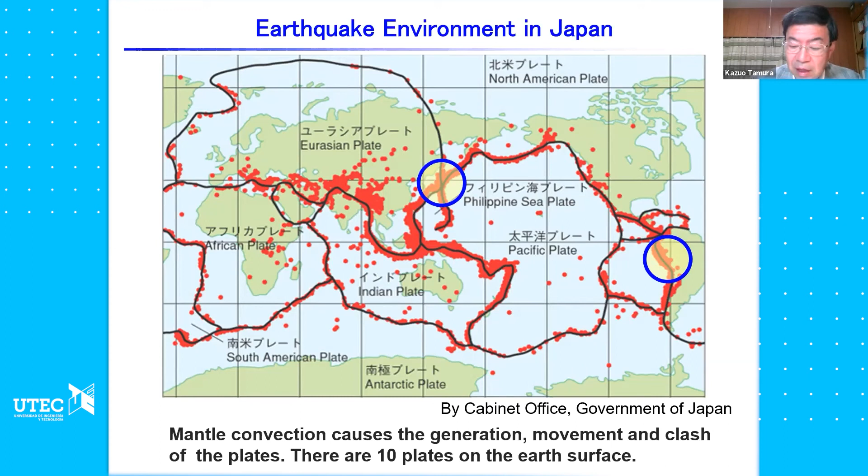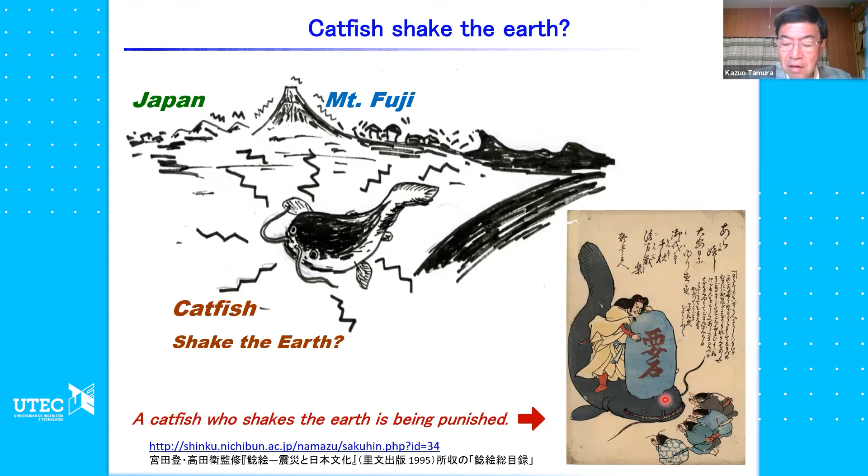In Japan, modern structural technologies have been applied, developed, and progressed since the late 1800s. However, these structures were often damaged by large earthquakes. The structural systems and seismic design methods have progressed through the experience of these earthquake disasters. But now, a vast majority of building structures in Japan are designed by the earthquake-proof design method. At the same time, the idea of isolating the structure from earthquake ground motion had been a people's dream. From now, I will talk about ideas and development of seismic isolation.

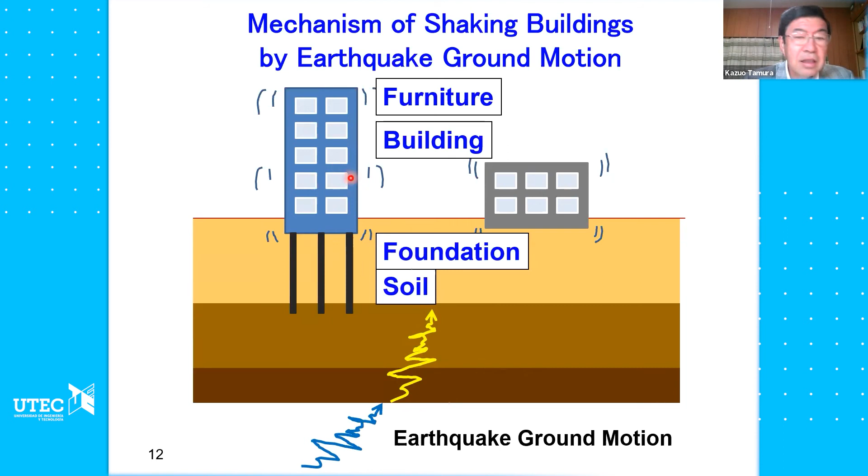Buildings are shaken by the earthquake ground motion, like this figure. The soil under the foundation shakes the buildings, and the building shakes the furniture in the building. By inserting an isolation layer at the bottom of the building, the shaking amplitude of the building and the furniture will be reduced. This is seismic isolation.

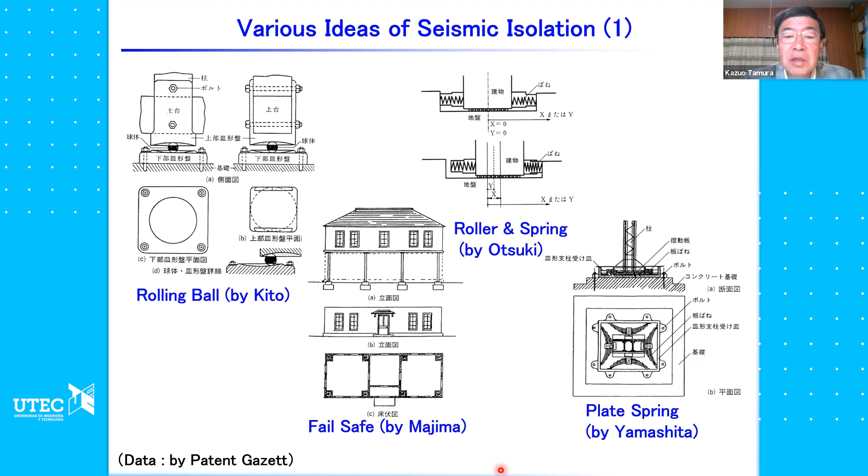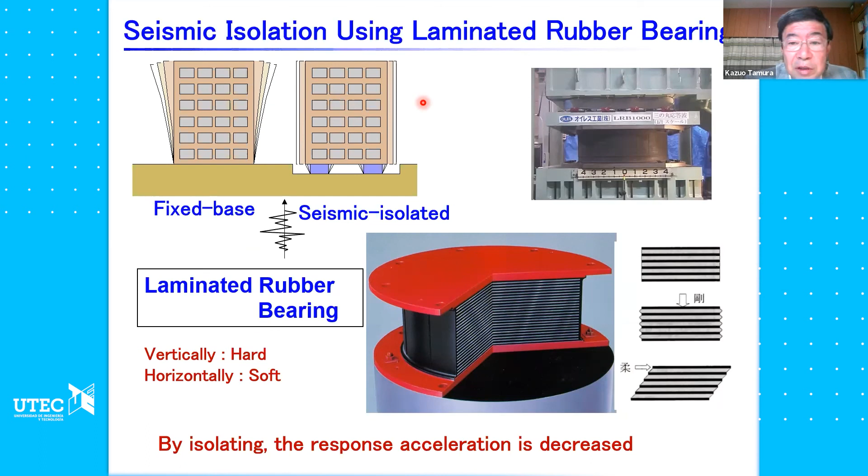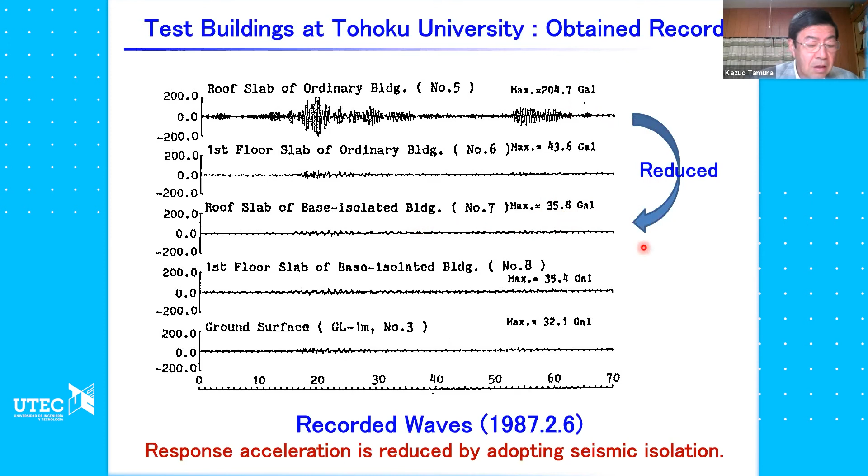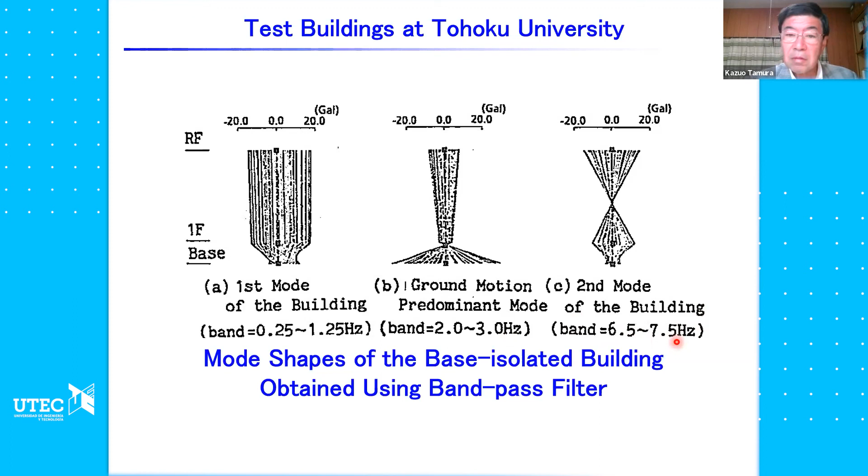In the simulator tests, the level of earthquake input motion included the design level and also the ultimate level. Ultimate level means a very large amplitude level, since we wanted to know the ultimate response properties. The applied maximum shaking level was 60 to 70 centimeters per second in this case.

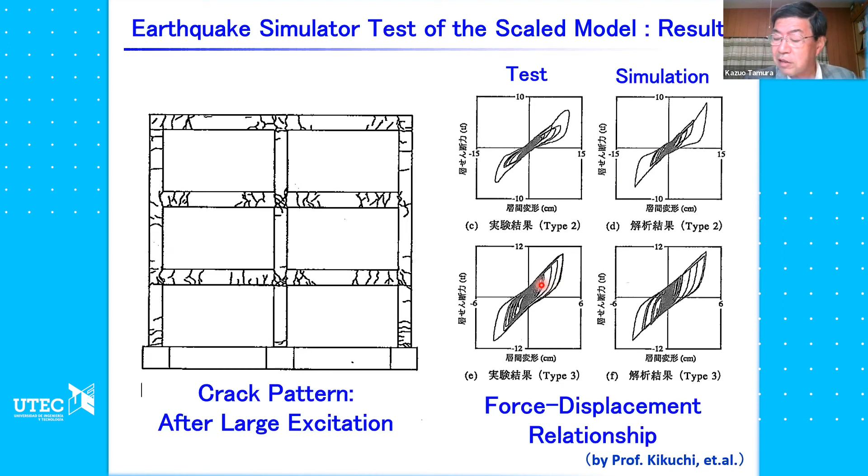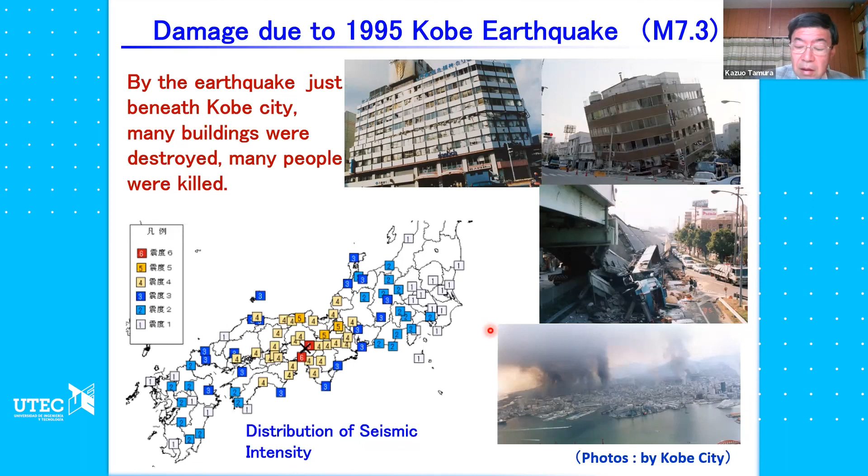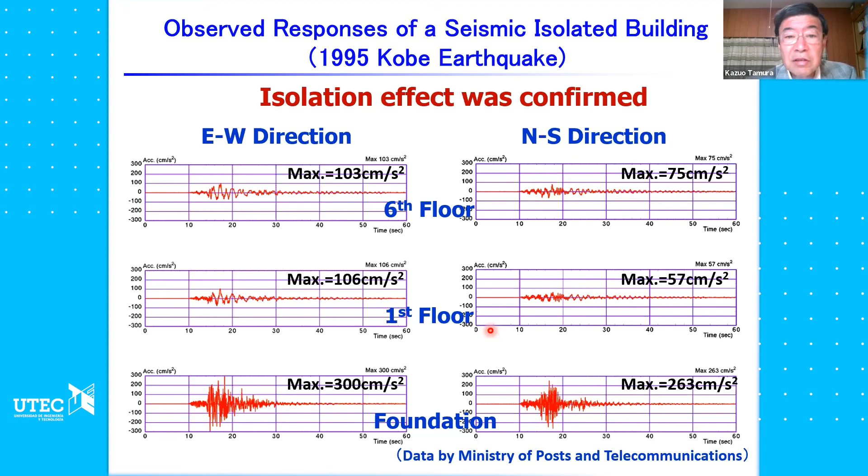Because the effectiveness of the seismic isolation method was demonstrated successfully by this building, seismic isolated buildings have increased drastically after the Kobe earthquake.

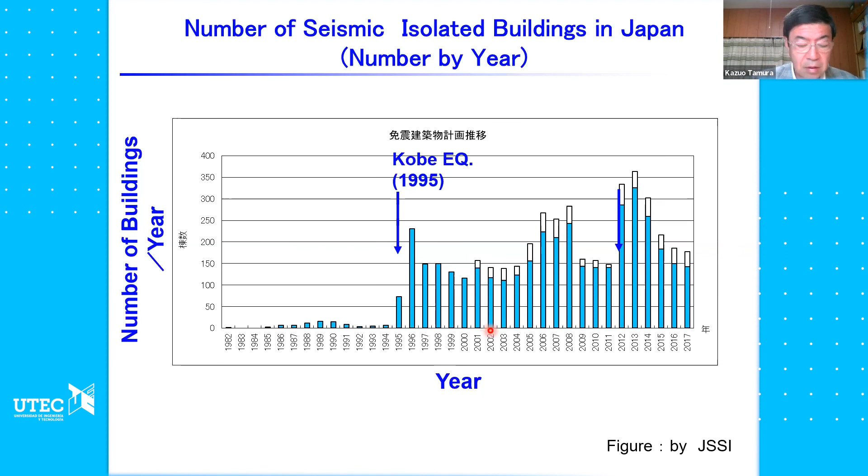The seismic isolation method has also been applied to existing old and historical buildings as a way of seismic retrofitting or strengthening.

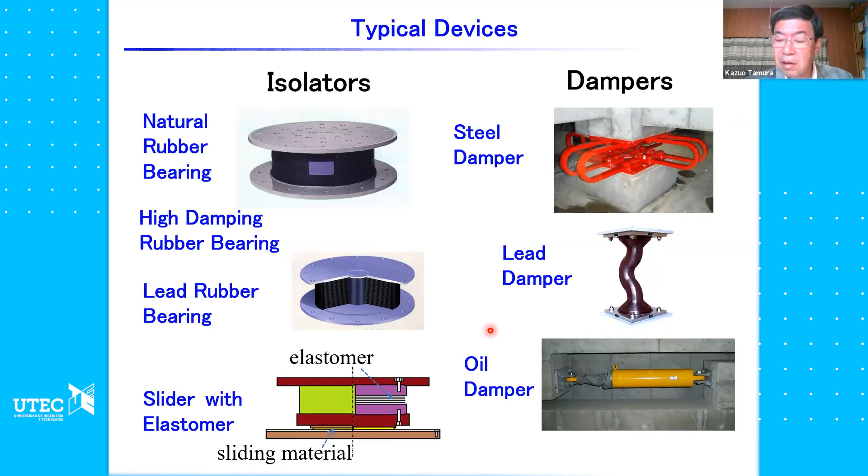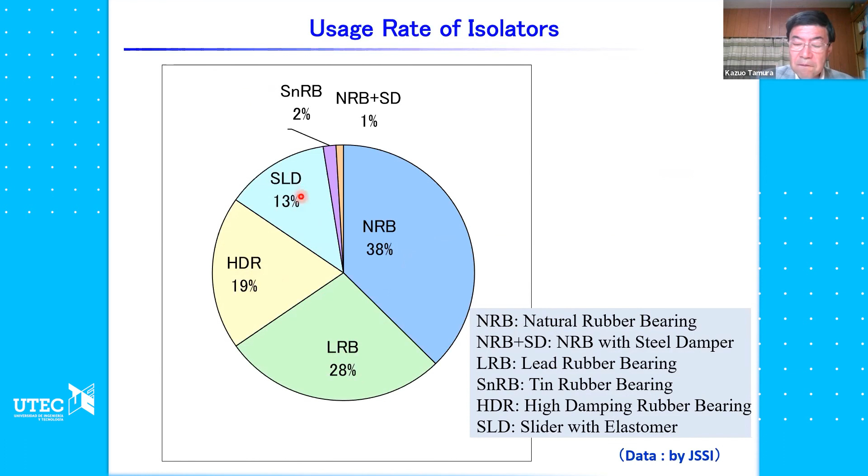As I have already mentioned, there are now around 5,000 seismic isolated buildings in Japan, and until now, all the isolated buildings which suffered large earthquake ground motion have demonstrated the effectiveness of the seismic isolation in real actual earthquakes.

Recently, seismic isolated buildings whose isolation layer is at the mid-story have become popular. In the case that the use of building differs at the upper and lower floors, this type of mid-story isolated structure can be effectively designed. But the balance among the mass, stiffness, and strength of the upper structure, lower structure, and isolation layer is very important, so the response properties of mid-story isolated buildings are carefully evaluated in each case.

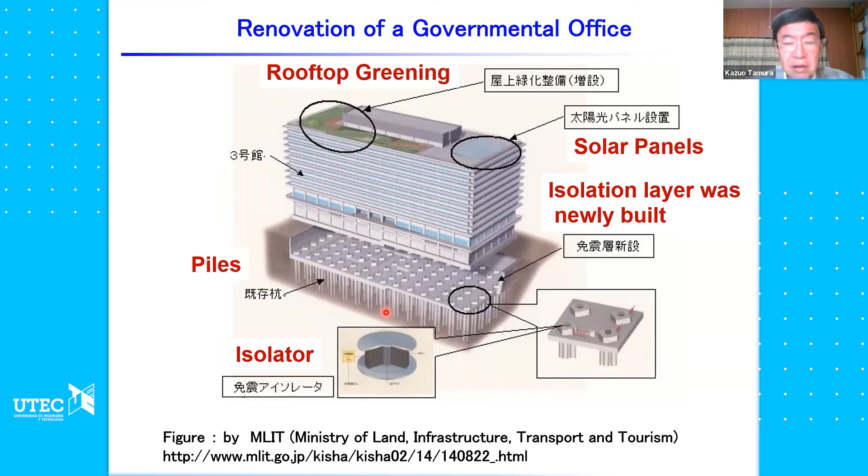This is an example where a governmental office was renovated using seismic isolation retrofitting. The isolation layer was newly built, and many isolators were installed under the building, along with the existing piles. By using this method, the building was seismically reinforced while still in use.

Next, I am going to introduce the performance of seismic isolated structures in recent large earthquakes by showing examples, starting with the 2011 Tohoku earthquake, a very big earthquake. The magnitude was 9.0, the fourth largest earthquake in the world. The size of the fault is about 500 kilometers by 200 kilometers. Almost all of Japan was shaken by the earthquake, and a great many lives were lost due to the huge tsunami.

This earthquake caused various kinds of serious damage. The strongly shaken area was so broad that a great many structures were affected and received various types of damage. In this earthquake, many records of ground motions and responses of structures were obtained. We now have a large number of seismic isolated buildings in Japan, many equipped with seismographs.

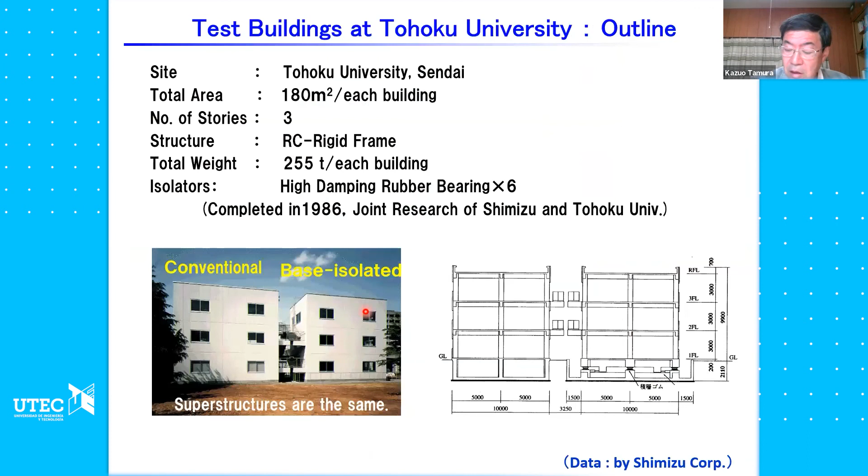Next is the seismic isolated Ishinomaki Red Cross Hospital building. This building is located in Ishinomaki City, which was struck by a huge tsunami and earthquake, and the shaking amplitude was very large because the distance from the earthquake source was very short. This building played an important role just after the earthquake. Even though the ground shaking was very severe, this seismic isolated building maintained its function as a hospital, and a great many injured people received medical treatment there after the earthquake.

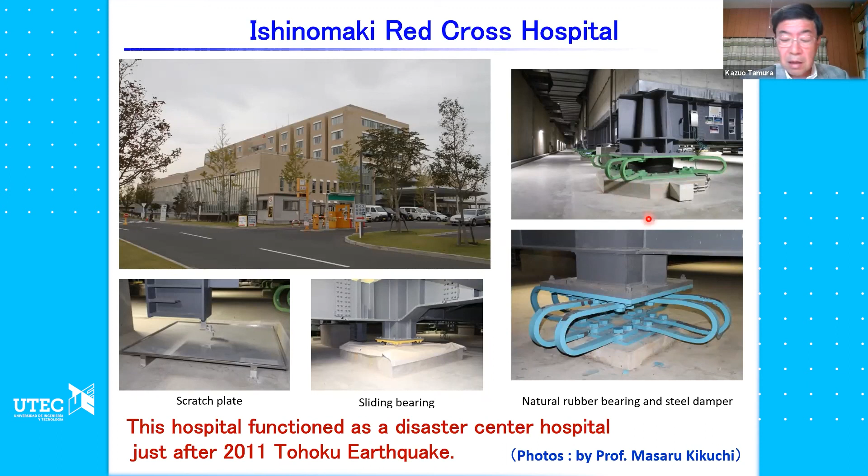This movie... it doesn't work, that's no good. A very exciting video that cannot work.

Professor Tamura, please press escape and then you will have your mouse back. Escape, yes, press escape once, just press it on your keyboard, the top left key. Okay, now you can click on your video. You have your mouse back. Thank you.

This movie shows the state of the hospital when the earthquake occurred. This is an isolated building, but if this building was not isolated, a more severe condition would have been observed.

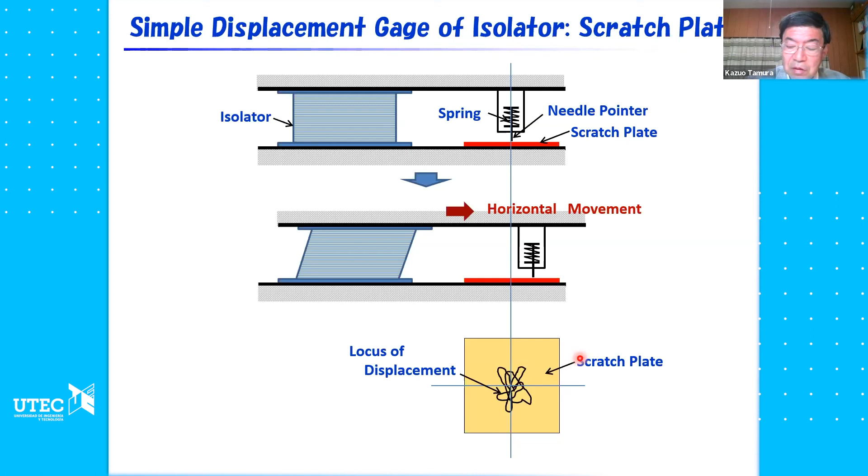Next, I am going to talk about seismic isolated buildings located in Tokyo, which was about 300 kilometers apart from the epicenter of the earthquake.

However, the ground shaking was very strong. The observed acceleration was about 150 to 200 Gal.

This figure roughly shows the response level of buildings in Tokyo. This right graph shows roughly the earthquake shaking levels. The response level of ordinary buildings was about 250 to 300 Gal.

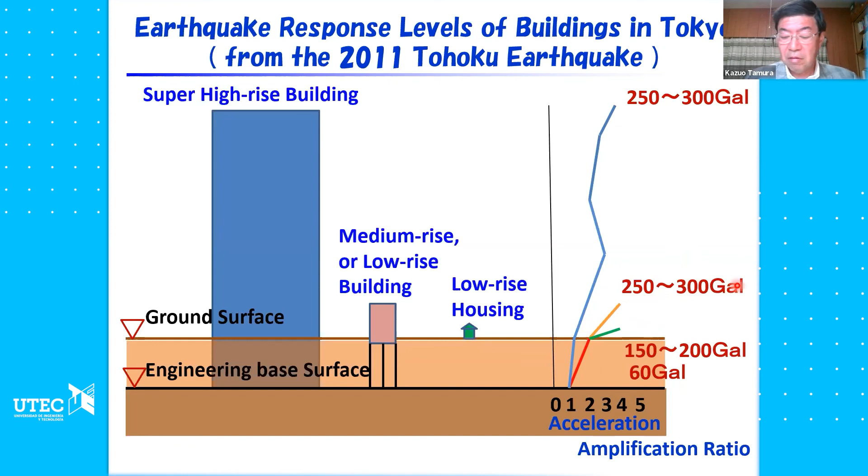Here I'm going to introduce the responses of seismic isolated buildings in Tokyo. There are many seismic isolated buildings in Tokyo. As an example, I will show you this building. I had worked for Shimizu Corporation and worked in this building. This building is the main building of Shimizu Institute of Technology. The building is supported by 6 lead rubber bearings installed on top of RC columns in the ground floor.

A video camera is set up beside one isolator and successfully recorded the real movement of the isolator. The maximum displacement of the rubber bearing was about 8 centimeters in this building.

This is a recorded motion video. Once again, the actual movement, very small movement, but like this. Actually, the upper building was moving.

Okay, thank you. Maybe time is past.

As the last example of seismic isolation, I'm going to introduce a seismic retrofit. The National Museum of Western Art was designed by a famous artist, Le Corbusier. The museum was registered as one of the UNESCO World Heritage sites in 2016.

This museum was constructed originally in 1959 based on the conventional earthquake-proof design code at that time. It was seismically upgraded in 1998 by applying the seismic isolation system. A new isolation layer was built under the original foundation, and 49 high damping rubber bearings were installed under the superstructure. This is Japan's first seismic isolation retrofit project.

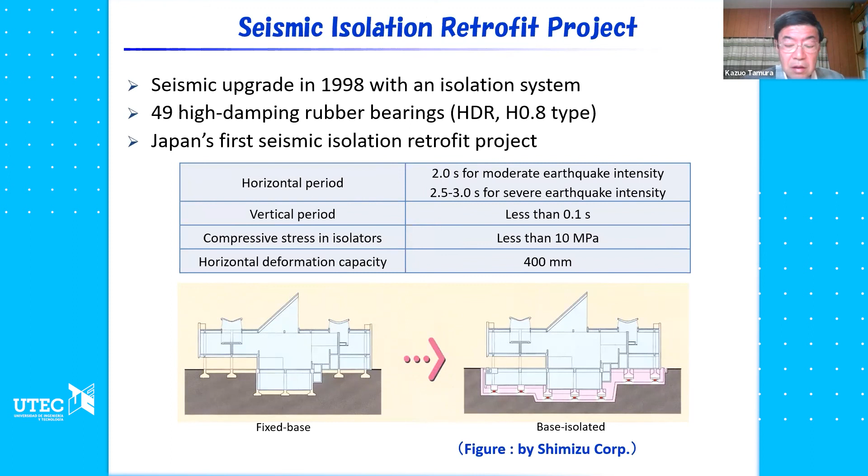This is the simulation result by Prof. Kikuchi of Hokkaido University. It's very good simulation - the simulated motion and observed motion are almost the same.

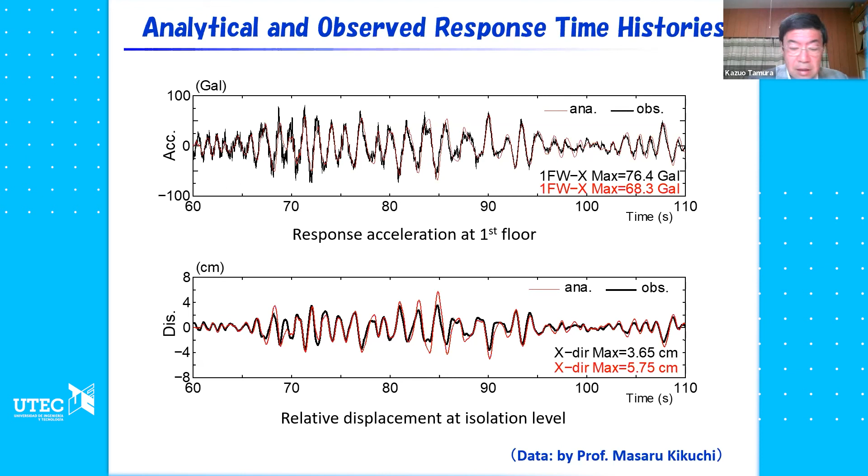One more, maybe two more slides. In 2016, large earthquake waves attacked Kumamoto prefecture, located on Kyushu island far west of Tokyo. Now I'm going to introduce the seismic isolated hospital located in this area.

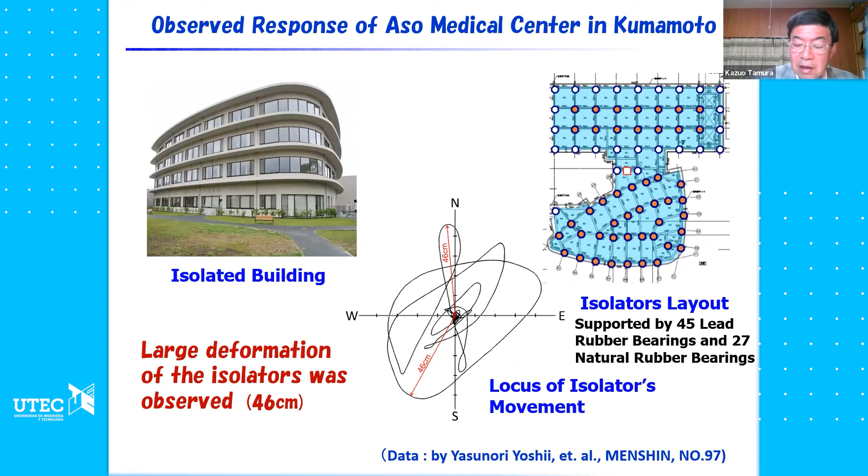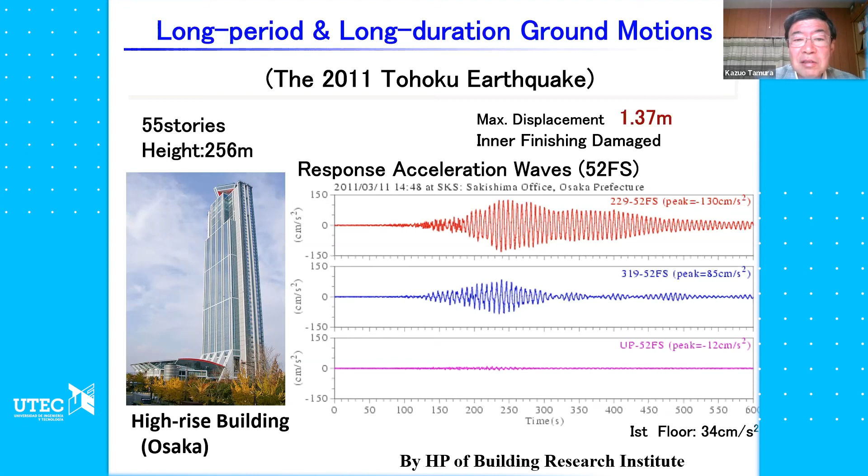Because time has come, I will skip this one. In Japan, long period, long duration earthquake motion was a topic for the design of isolated buildings. We are now focusing on this long period, long duration earthquake motion. So ultimate behavior of seismic isolated buildings is one of the main topics in seismic isolated building design.

This is where I will stop my presentation. Thank you very much. This is the end.

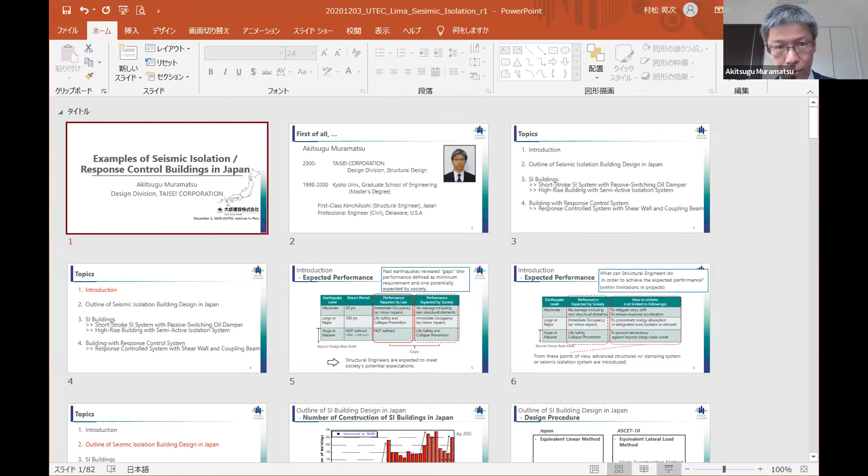This is my presentation title: Examples of Seismic Isolation Response Control Buildings in Japan. My name is Akitsugu Muramatsu. I'm a structural engineer from Taisei Corporation, a construction company based in Japan. I started my career as a structural engineer in 2000.

These are today's topics. First is introduction, second is outline of seismic isolation building design in Japan. Then I'd like to introduce two SI buildings—in my presentation, SI means seismic isolation—and one building with a response control system.

This is the first topic: the background of my presentation. Past earthquakes revealed gaps between the performance defined as minimum requirement by law and the performance potentially expected by society. This table shows the minimum required performance and the expected performance according to each earthquake level. There are gaps between the two, and usually expected performance is higher than minimum requirement.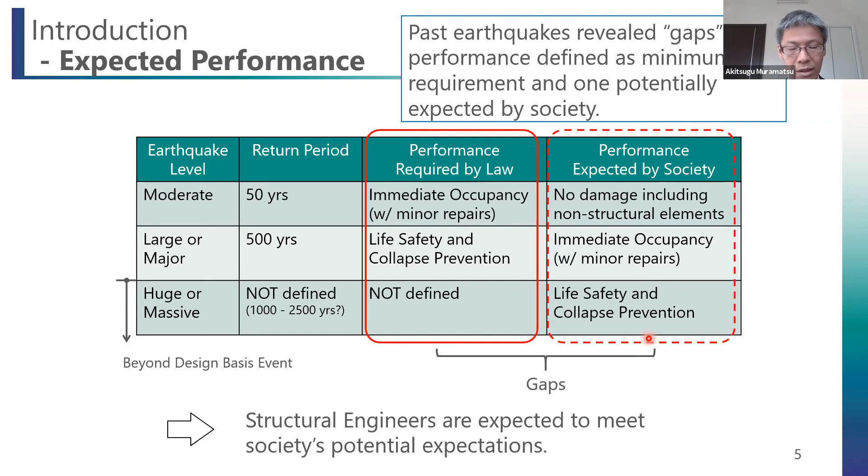This is the second topic: outline of seismic isolation building design in Japan. This figure shows the number of SI buildings constructed in Japan. The vertical axis shows the number of SI buildings, and the horizontal axis shows year. Until 1995, the number of SI buildings was not so high.

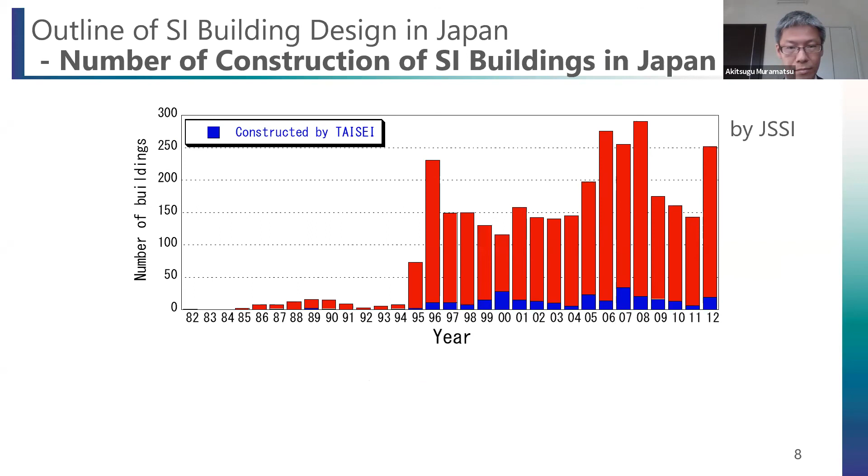In 1995, a large earthquake occurred, the Kobe earthquake. After that, many people learned that the performance of SI buildings in protecting lives and properties was impressive. The number of SI buildings rapidly increased after the earthquake, here and here. Although there are a few sharp increases right after major earthquakes, the average number of construction of SI buildings was about 150 per year in the last two decades.

As of 2017, the total number is over 4,500, and our company has constructed about 10% of SI buildings in Japan. So I'd like to show some features of SI building design in Japan.

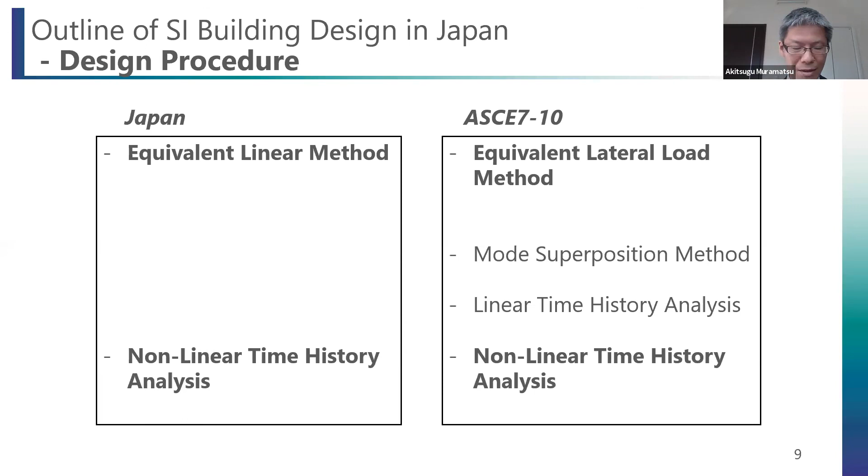I learned some materials about your country's seismic codes, which seemed similar to the United States design code. So I'll introduce some points comparing with the US seismic design code, ASCE 7-10. I also learned that your SI design code has already complied with ASCE 7-16, so this comparison with 7-10 may be a little different from your current code.

As for design procedure, two procedures are allowed to design SI buildings in Japan: static and dynamic procedures. The Japanese static procedure, the equivalent linear method, is similar to the US static procedure, the equivalent lateral load method. Nonlinear time history analysis is allowed as the dynamic procedure. Static procedure is simple and useful, but there are several restrictions on its application, so nonlinear time history analysis is widely used for design of many SI buildings in Japan.

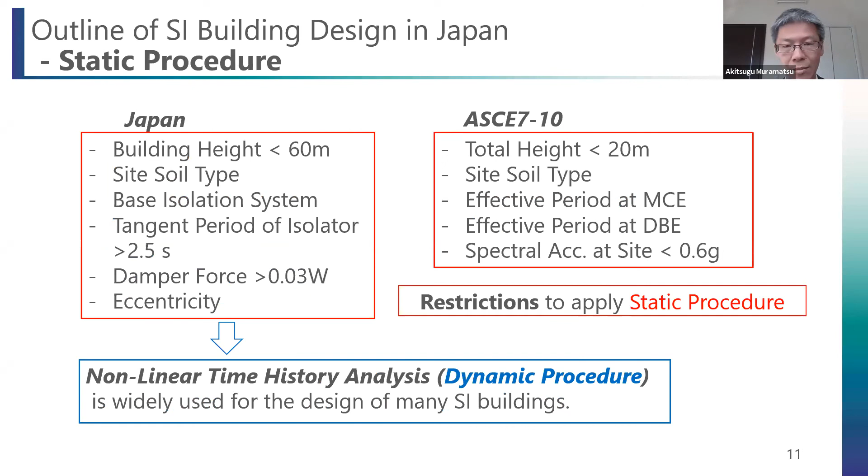As for typical types of SI systems, they usually consist of isolators and dampers. There are various devices to choose from, such as rubber bearings and sliding bearings for isolators, and oil dampers, steel dampers, lead dampers, and so on for dampers. Adequate devices should be selected to mitigate seismic response efficiently according to each building's type, use, and required performance.

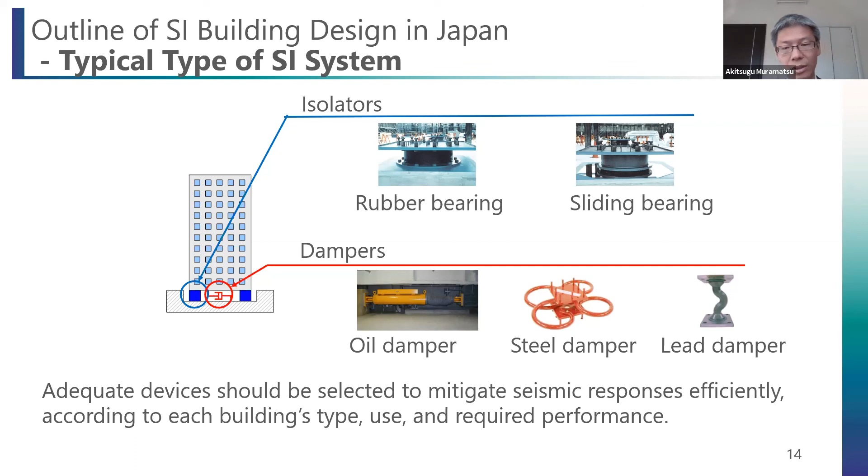This video shows dynamic tests of natural rubber bearing. Isolators can smoothly deform in horizontal directions and can support vertical load under large horizontal deformation. This is another video about sliding bearing.

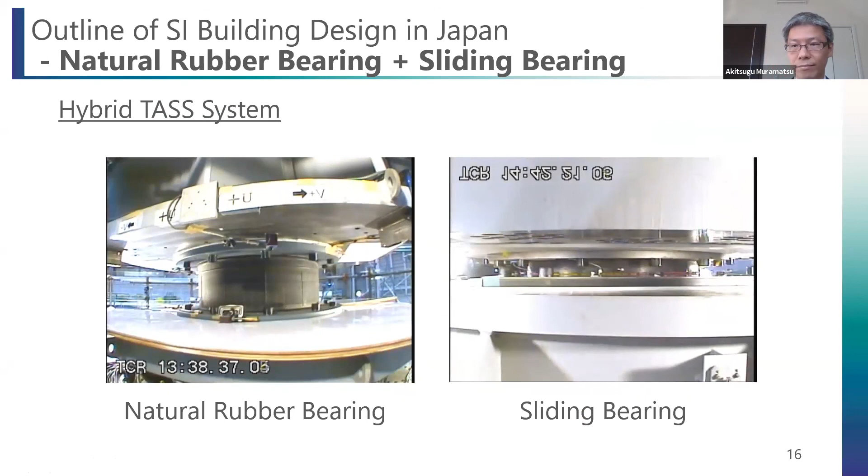The good performance of the hybrid SI system has been proved by past large earthquakes. These photos were taken in two hospital buildings, which were next to each other. The left one is inside a non-isolated building, and the right one is inside an isolated building. You can see the big difference between the two photos.

If you were a doctor, how would you work under the left photo's condition after an earthquake? The isolated building kept operational right after the earthquake. Keeping operational right after an earthquake is one of the great benefits of SI structures.

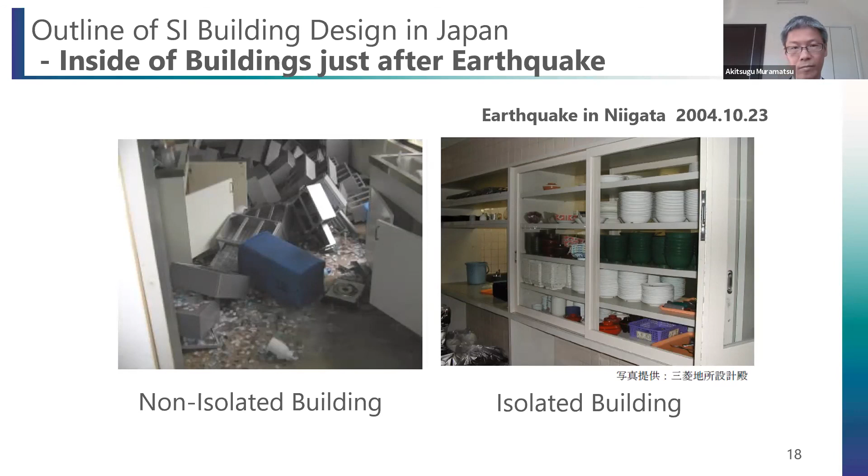So this is the next topic. I'd like to show one example of a short stroke SI system with a passive switching oil damper. This is the background of why we have developed this short stroke SI system.

After several major earthquakes in Japan, demands for SI systems are continuously growing, as I mentioned in the figure in the previous slide. Even for buildings of relatively small size, often located in densely urban areas like Tokyo or Lima, SI systems are highly required to protect property and operational function, and to achieve companies' business continuity plans, or BCP.

In order to implement an SI system in a small site, the response displacement of the isolation layer due to major earthquakes needs to be mitigated to keep the building area as large as possible. In conventional SI buildings, the design clearance between the building and the moat wall is usually 60 centimeters or so. In a relatively small site, if we wanted to keep the same clearance of 60 centimeters, the possible building area would be reduced. By mitigating the response displacement of the isolation layer, we can keep the building area as large as possible.

So large damping is necessary to mitigate the response displacement. For building response due to major earthquakes, if we install large damping into the isolation layer, we can prevent collision. But for frequent minor or moderate earthquakes, large damping will result in large response acceleration. This may not be good isolation performance.

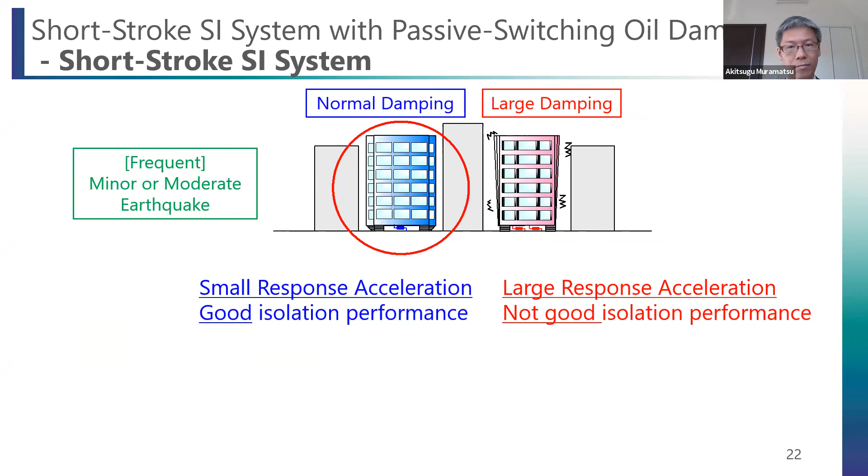So normal damping may be good in order to mitigate response acceleration due to minor or moderate earthquakes. Normal damping is preferable to large damping for minor or moderate earthquakes, but large damping is necessary to prevent collision during major earthquakes.

So this is the issue to be solved. In the case that the site is not spacious, mitigating response displacement during a major earthquake by large damping is necessary. But reducing response acceleration during a moderate earthquake is also required, and this is a contradiction.

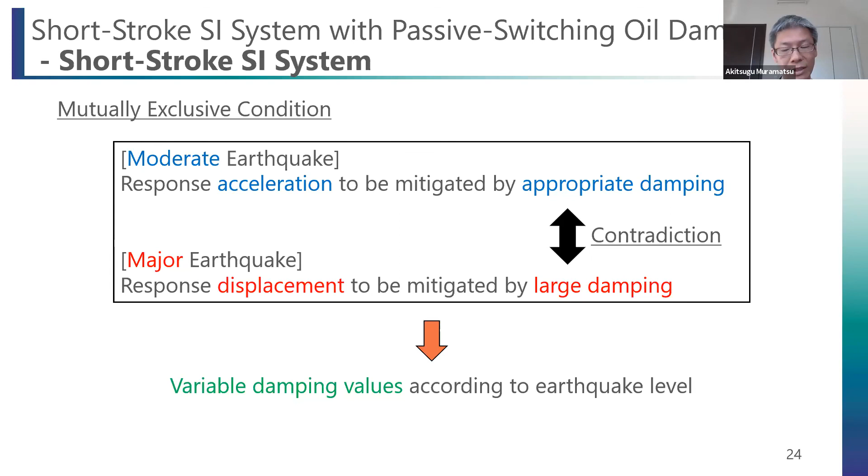So we employed a viscous damper whose properties can change. This variable damping means a lower damping coefficient for moderate earthquakes and a higher damping coefficient for major earthquakes. So we developed a passive switching oil damper. This is a kind of variable viscous damper.

This figure shows the damping properties of the passive switching oil damper. The vertical axis shows damping force, and the horizontal axis shows velocity. This damper has two modes. One is a lower damping mode, which is assigned to the initial condition.

The other one is a higher damping mode. The damping coefficient is switched from the lower one to the higher one after exceeding a designated displacement. In this project, we set 10 centimeters as the designated displacement. This displacement can be changed according to each project.

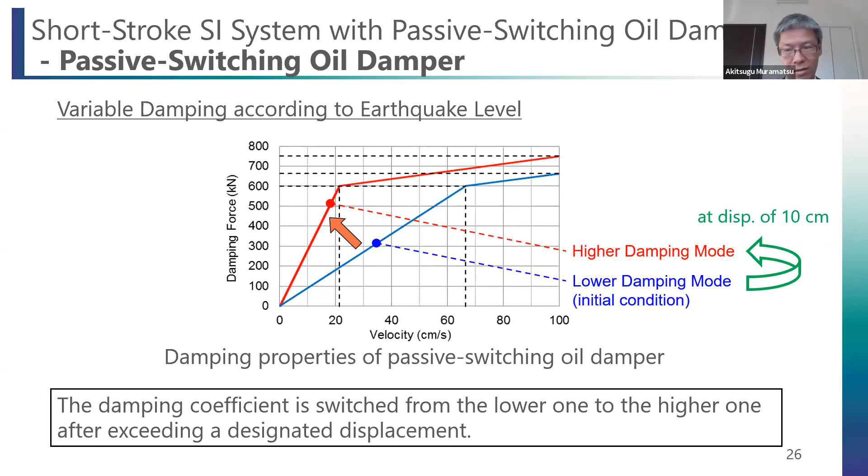This passive switching oil damper has high reliability. The damping coefficient is mechanically switched from lower to higher without electrical power, which leads to high reliability and easy maintenance. The shut-off valve stays closed once switched, so after the earthquake, the initial low damping mode is recovered by using a manually operated lever.

So this is a summary of merits of passive switching oil damper. The first one is low damping coefficient resulting in full demonstration of isolation performance during moderate earthquake. And high damping coefficient results in mitigation of response displacement during major earthquake, including beyond design basis event. So safety is ensured during major earthquake without compromising the sense of security during moderate one.

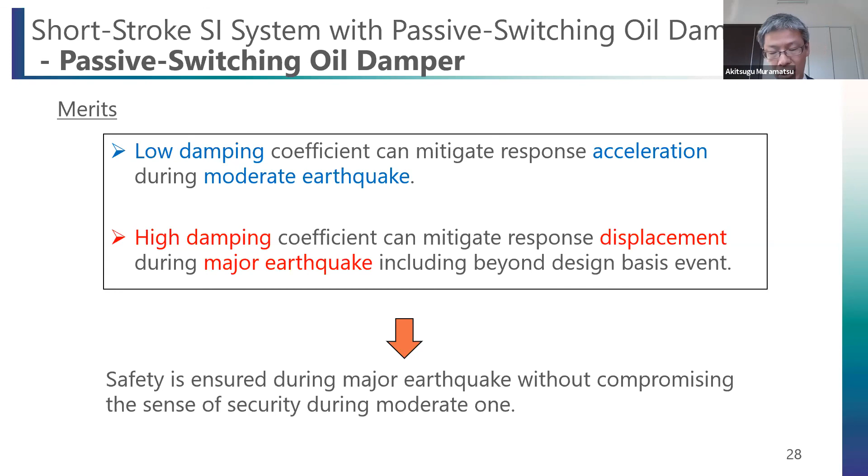We applied this system to a few buildings. I'd like to introduce one example, which is called ZEB demonstration building. This is a seismic isolation building with the passive switching oil damper, newly constructed in our technology center. This slide shows the structural systems. This is a 3-story building. Isolation layer is here.

And the lateral force resisting system of superstructure is moment resisting concrete frame with concrete shear wall and very slender column with high strength concrete of 300 megapascal as gravity element.

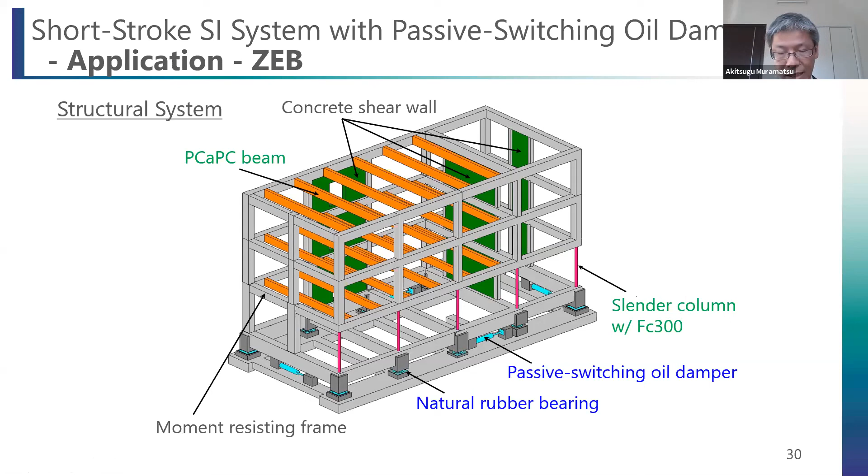And this slide shows the plan of isolation layer. The isolation system is composed of natural rubber bearing, the red one, and the flat sliding bearing, the blue one, and the passive switching oil damper, the green one. The design clearance between the building and the moat wall is 300 millimeters, which is almost half of the typical clearance of conventional seismic isolation structures.

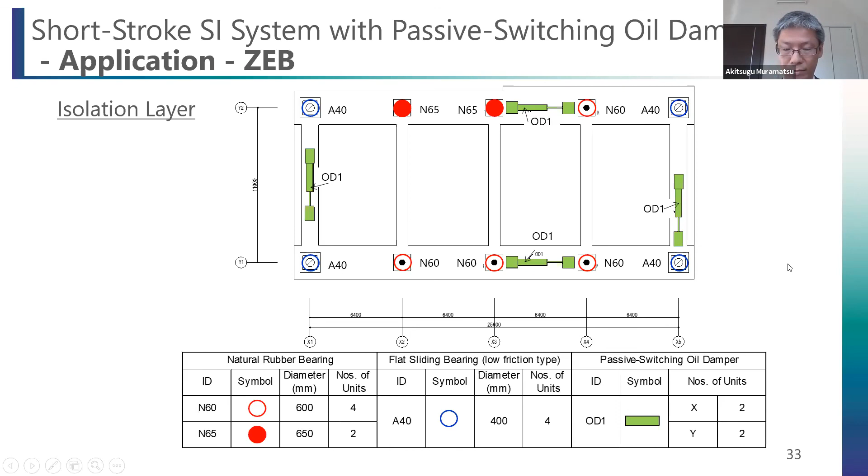And this is a comparison between passive switching oil damper and conventional oil damper. So the right figure shows the damping properties of oil dampers. Black line shows the property of conventional damper, and the red line shows the property of the higher damping mode of passive switching oil damper. The left figure shows the result of nonlinear time history analysis with stick model and major earthquake.

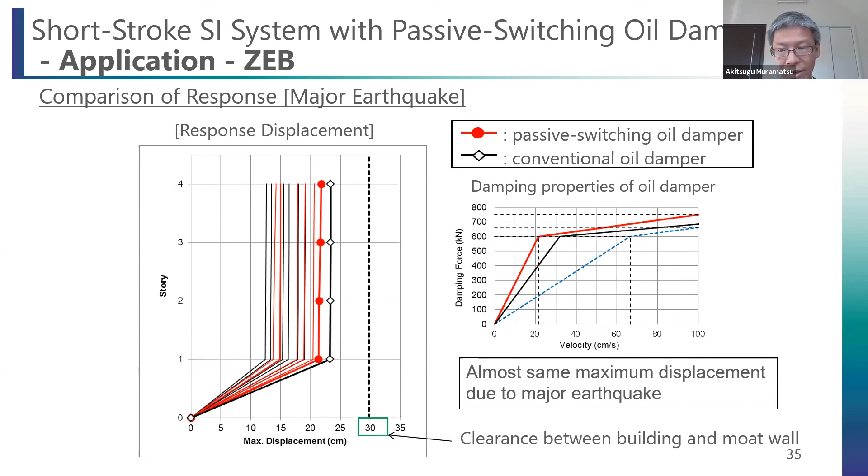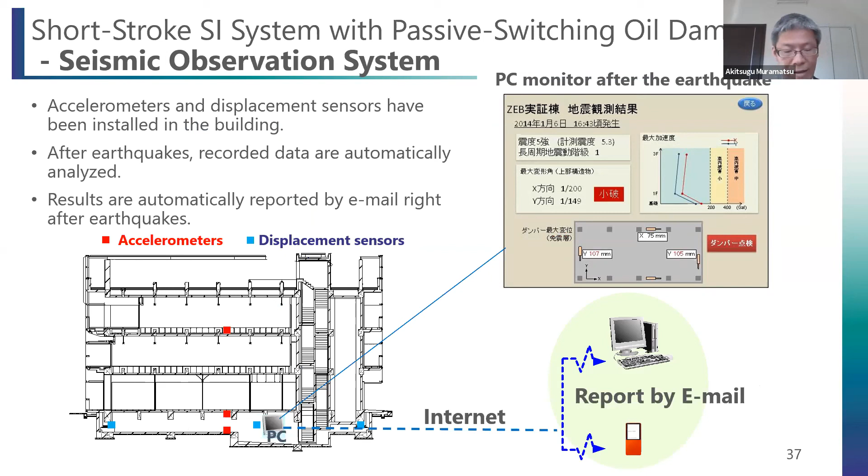And this slide shows an example of the automatic report. The red line shows the recorded acceleration in the main buildings, which is not a seismic isolation building. And the blue line shows the records in ZEB, which is next to the main building. So you can see the effect of seismic isolation is fully demonstrated.

And the short stroke seismic isolation system with passive switching of the damper has been applied to some buildings in Tokyo. The center one is an application to a high-rise building. And the right one is an application to an existing building of a local government.

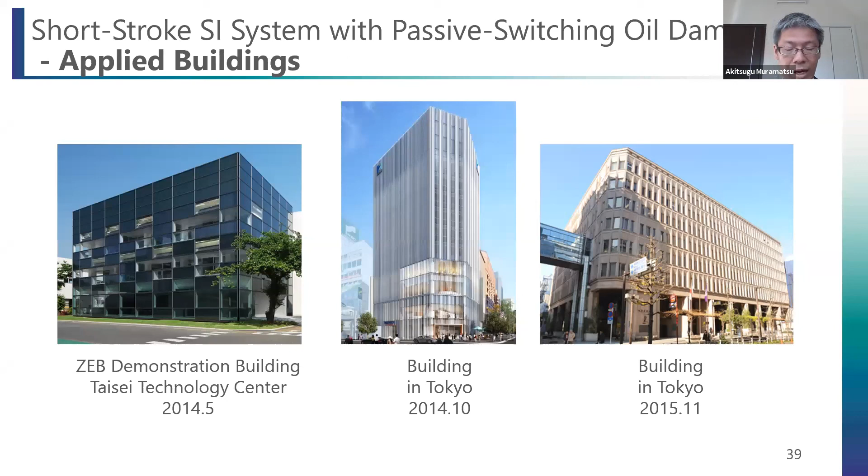And here, this is the next example. Another example is high-rise building with semi-active isolation system. This slide shows outline of semi-active isolation in chronological order.

When an earthquake occurs, sensors inside and outside the building catch the vibration. Then a computer starts calculation to get an optimal damping force according to the information from sensors. Computer controls damping force of oil dampers to mitigate shaking of buildings.

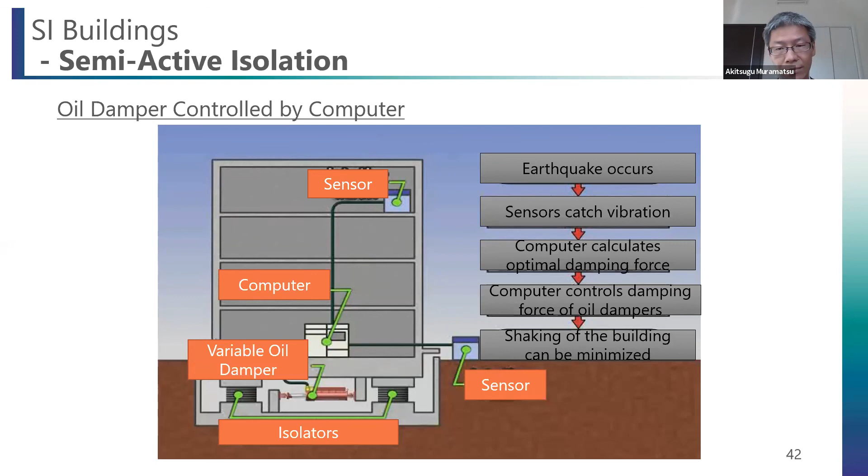And the semi-active isolation system has been adapted to this high-rise building. The height of the building is 130 meters. This building was constructed before the Tohoku earthquake in 2011, so we got some observed records.

These red square marks are recorded maximum acceleration, and the white squares with red line are the result of simulation. On the other hand, the blue line is the result of simulation if this building was not a SI building. So the semi-active isolation system can significantly reduce the maximum response acceleration.

The acceleration values at a few floors are listed in this table. The ground acceleration was 97.7, and the response accelerations were 29.2 and 46.1 centimeters per square second at the basement first floor and roof floor respectively. So accelerations were reduced to 1/3 at the basement first floor and 1/2 at the top of the building in comparison with acceleration at the ground.

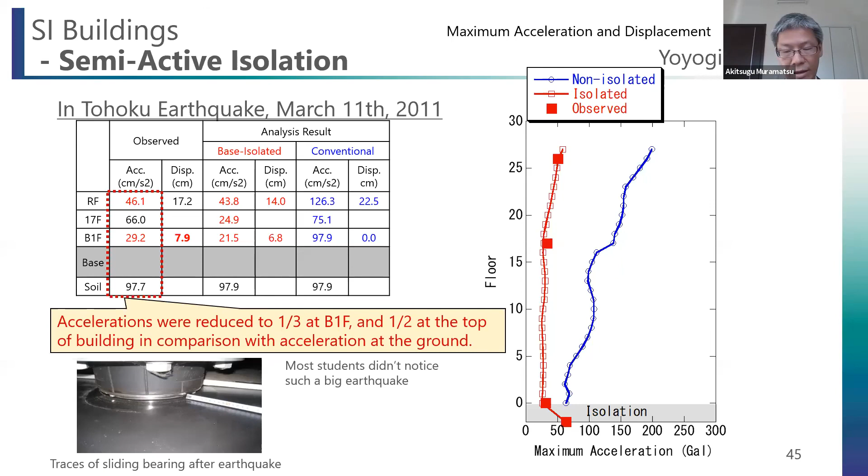And the occupancy of this building is a private school. Most students did not think that such a huge earthquake occurred thanks to the isolation effect. By adopting the semi-active SI system and the mega structure system, this building has a lot of flexibility in design.

This is a sky garden, and there are no columns which obstruct the nice view from the sky garden. This is a view from the sky garden, and this is also another view. And the classrooms are wide and spacious without columns.

This is also another spacious area on the first floor. So by adopting the semi-active SI system, this high-rise building has high seismic performance in addition to high flexibility of planning.

Next topic is an example of a building with a response control system. This example is a response control system with shear wall and coupling beams.

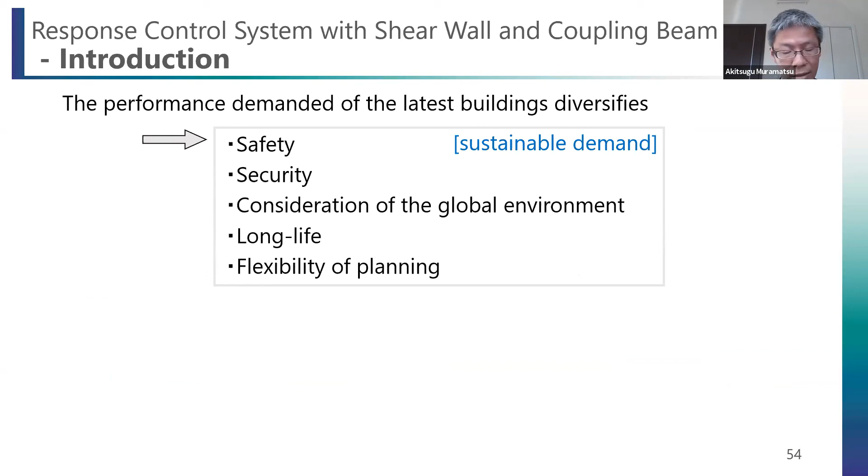This is the background of why we have developed a new response control system with shear wall and coupling beam. The performance demanded of the latest buildings is diversifying, such as safety, security, environmental protection, long life, and flexibility of planning. So it is necessary to develop a new response control system, which we call TASMO. Our buildings with the new system were expected to have high seismic performance and long life with flexible space.

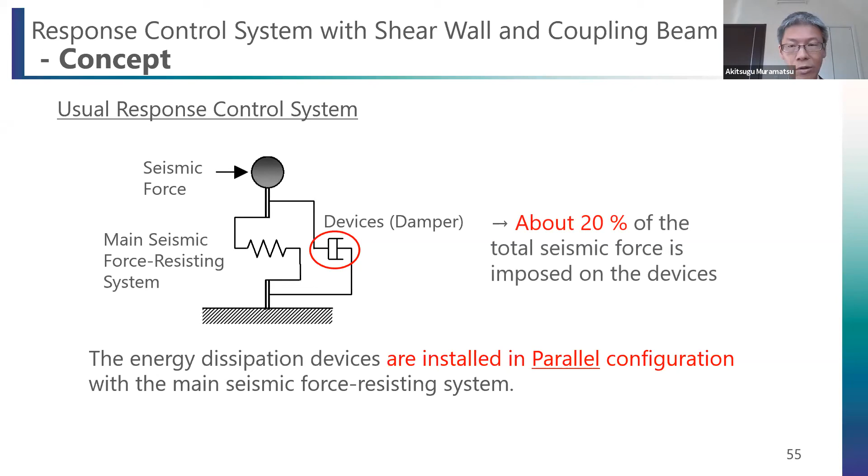This slide shows the concept. And this slide shows the usual response control system. This system consists of a main seismic force resisting system and damping systems. The damping devices are installed in parallel configuration with the main seismic force resisting system. So about 20% of the total seismic force is imposed on the damping devices.

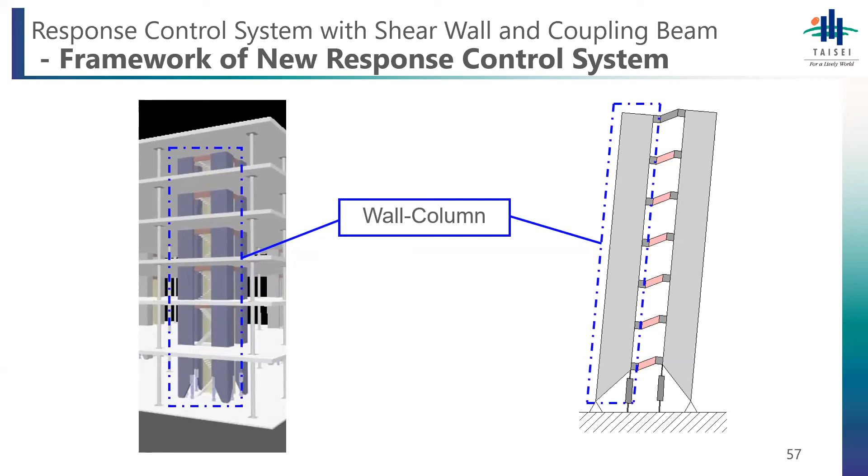This shows each element used in the system: wall columns, also called coupled walls, and coupling beams, which are steel dampers. Low-yield steel is used to absorb seismic energy effectively. And oil dampers are also installed at the bottoms of wall columns. But the main energy dissipation devices are steel dampers.

We applied this system to several buildings. I'd like to introduce one example where we applied this system to our branch in Sapporo, in Hokkaido. This is an office building with structural design concepts listed here: a long service life, high seismic performance, column-free inner space, and a new structure framework.

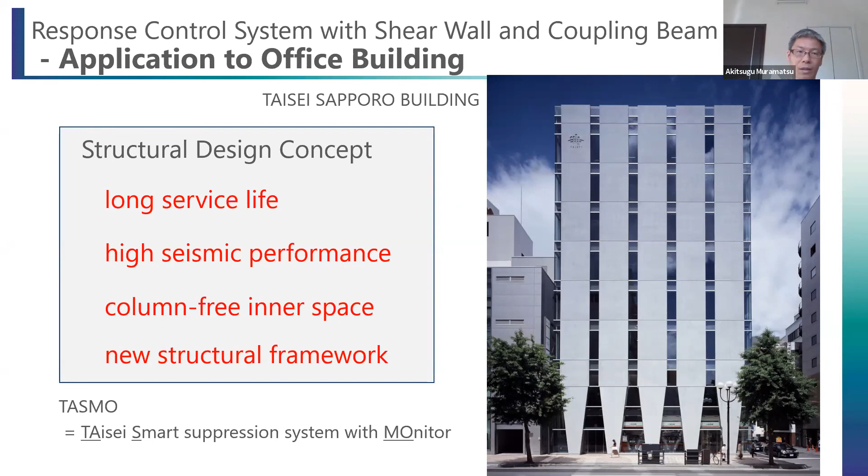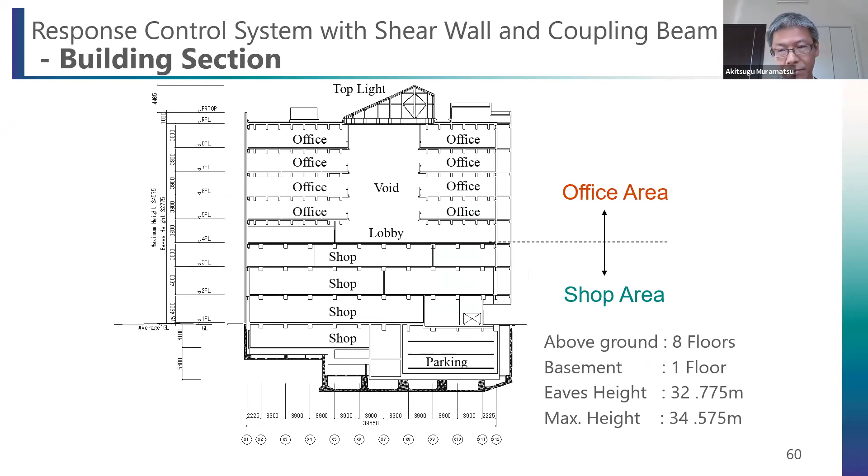In order to achieve column-free inner space, precast prestressed concrete beams are used. The span length is 18.6 meters. And this slide shows the close-up of the bottom of wall columns. You can see the coupling beam and the oil dampers absorbing energy when wall columns move.

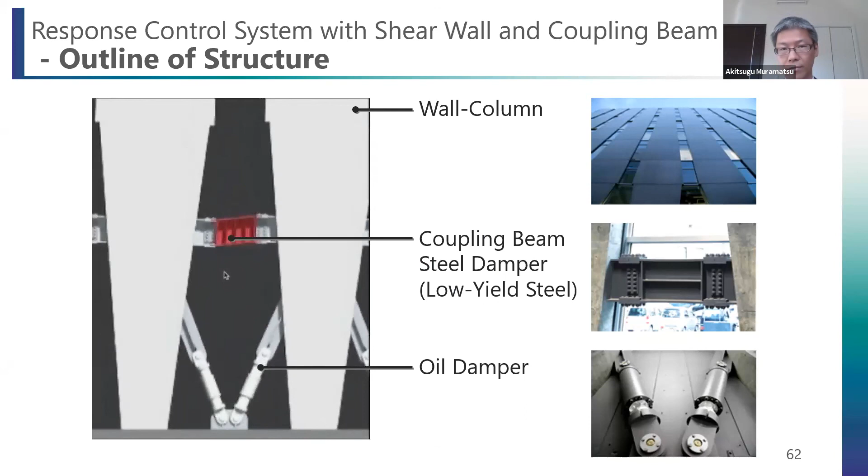As for materials of the steel damper, we adopt low-yield strength steel, which has lower yield strength and greater ductility in comparison with normal strength steel. Steel dampers can effectively absorb seismic energy by yielding early.

The ductility performance of low-yield steel has been examined by dynamic tests. This video shows one of the dynamic tests. The low-yield steel dampers have great ductile performance, and you can see the web plate deforming by shear force.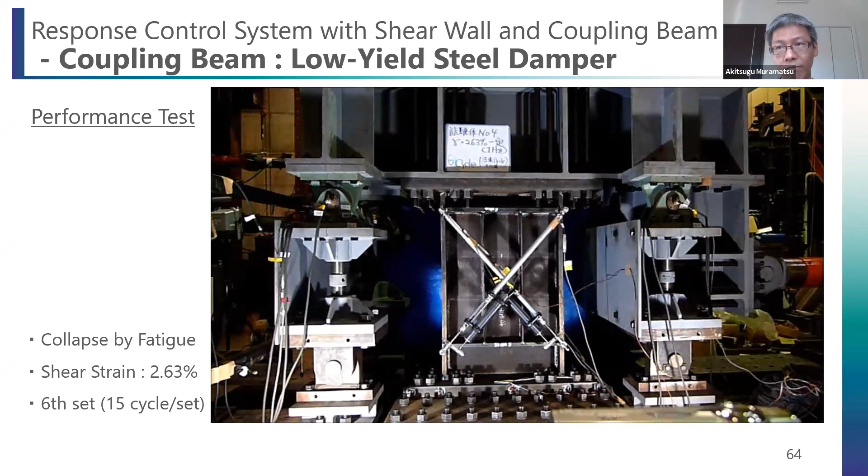This slide shows absorption of seismic energy by each component. The vertical axis shows cumulative energy and the horizontal axis shows time. This bold black line shows input seismic energy over large earthquakes with a 500-year return period.

The total energy dissipation by wall columns is about 10%. Moreover, hysteretic energy of wall columns is about 3%. That means structural damage on wall columns is expected to be very limited. On the other hand, energy dissipation by all dampers is about 90%. Especially, steel dampers absorb about 70% of input energy, so steel dampers are expected to work effectively against earthquake.

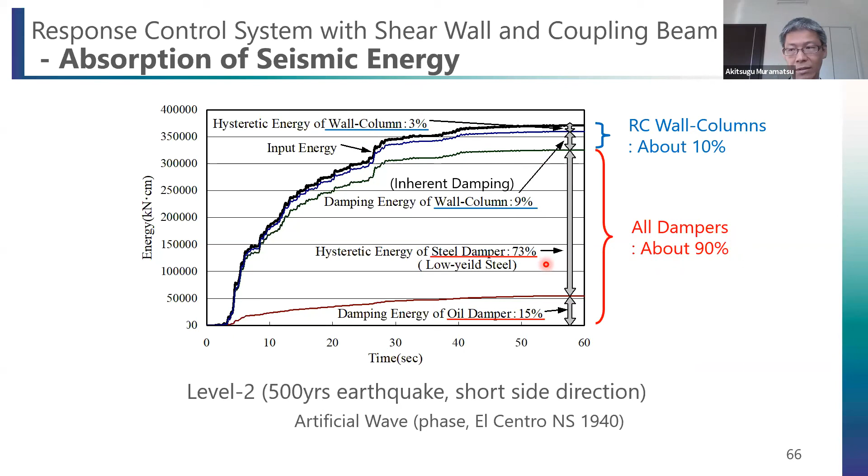To achieve column-free inner space, precast prestressed concrete beams are used. This slide shows some details of the precast prestressed beams. The span length is about 18.69 meters, and the beam depth is 750 millimeters, and high strength deformed reinforcement bars are used as tendon.

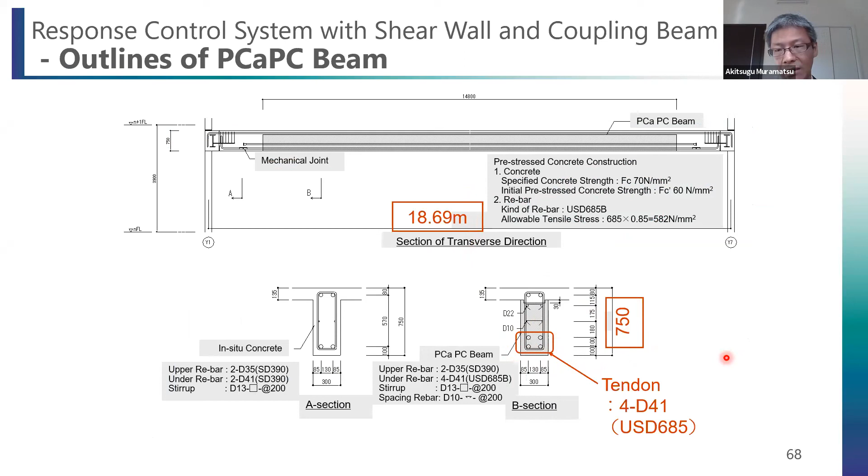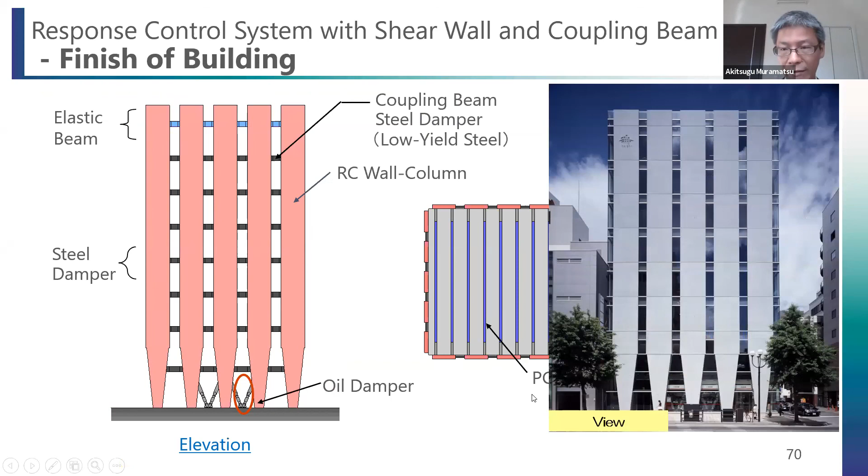This is a photo of the inside view, and this is a front elevation. These are oil dampers, and this is a coupling beam which works as a steel damper. Low yield strength steel is used for the web plate, and the shear strain of the web plate is monitored to examine the integrity of the building.

This is a summary. The steel dampers and the oil dampers are incorporated so that these devices act effectively and high seismic performance can be achieved. The soundness of the steel dampers and the whole building can be monitored from a distant place. Precast prestressed concrete beams are adopted to obtain flexible inside space and use the concrete surface as finishing.

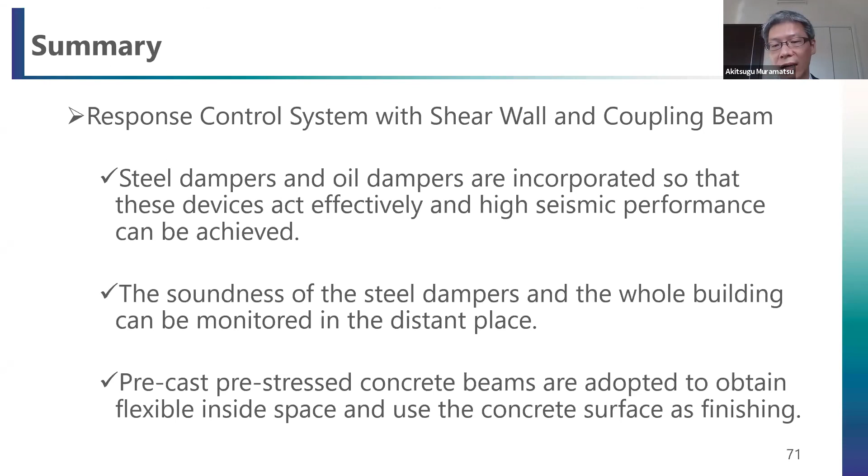This is another important topic. Good seismic performance cannot be achieved without good quality control of manufacturing and construction. Every single device has to be tested and reported to structural engineers before its installation. I'd like to show some photos on tests of devices.

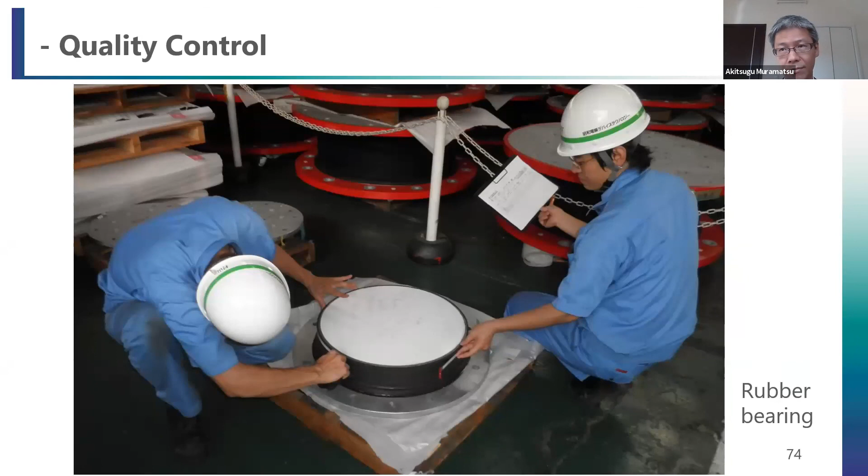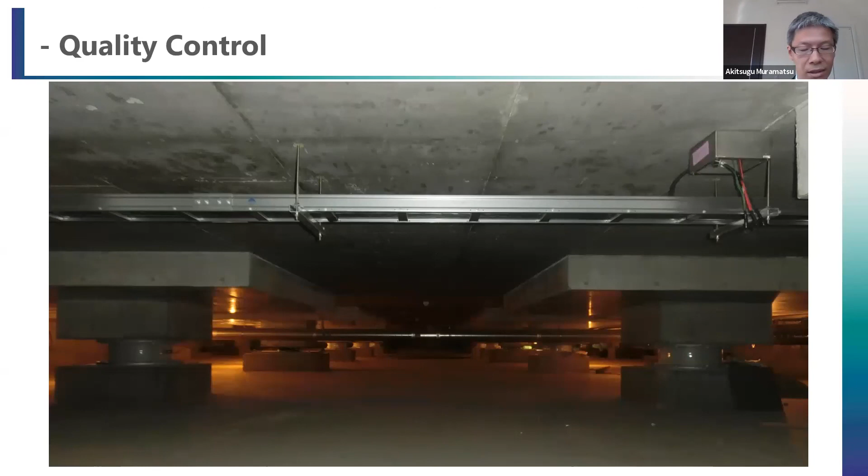Quality control of the construction site is also very important. Accuracy of installation has to be inspected and reported on time. The design clearance between the building and the moat wall has to be confirmed after completion, and the design clearance between the building structure and the piping also has to be confirmed after completion.

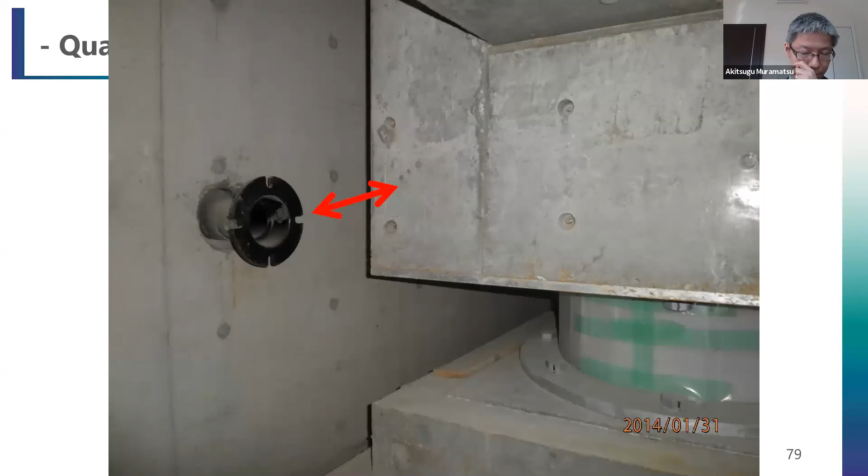These are also important points to keep building function after earthquake: confirmation of the flexibility of piping, and confirmation of the extra length of the electrical wires.

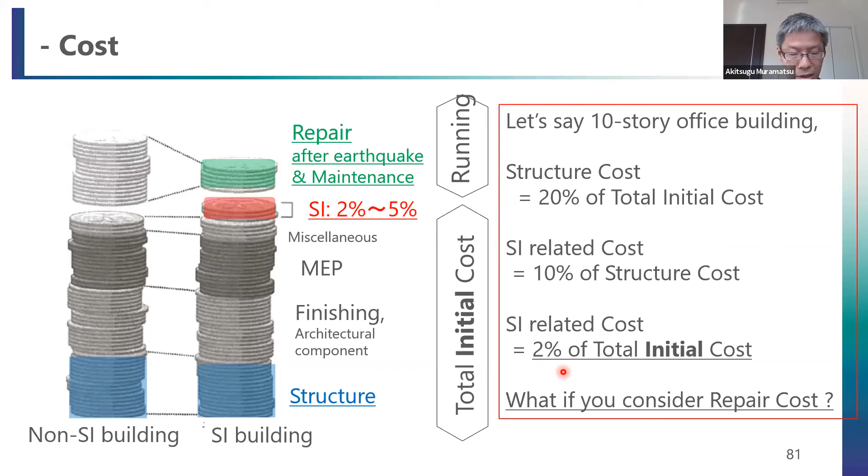So what if you consider repair cost after earthquake? SI systems are really cost-effective, especially in earthquake-prone countries like Japan or Peru. So why don't you choose SI system?

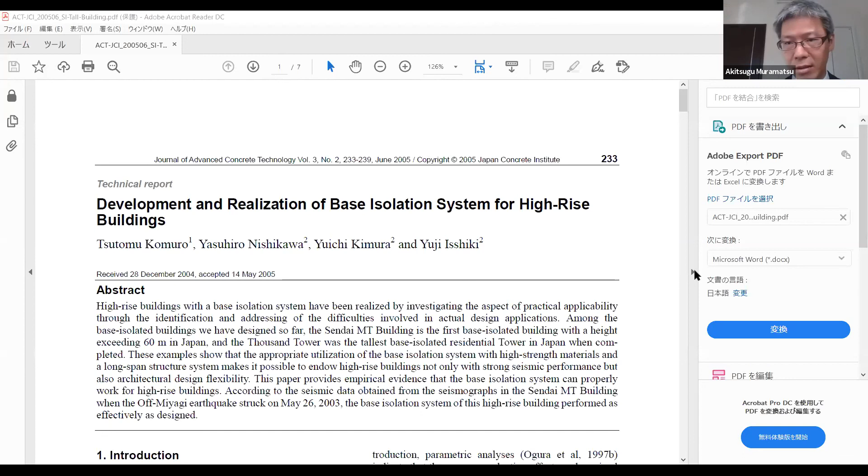This is a paper about the development and realization of base isolation systems for high-rise buildings - a study on base isolation systems for high-rise buildings. There were a lot of discussions about these topics in the late 90s and early 2000s in Japan, and this is one of those studies.

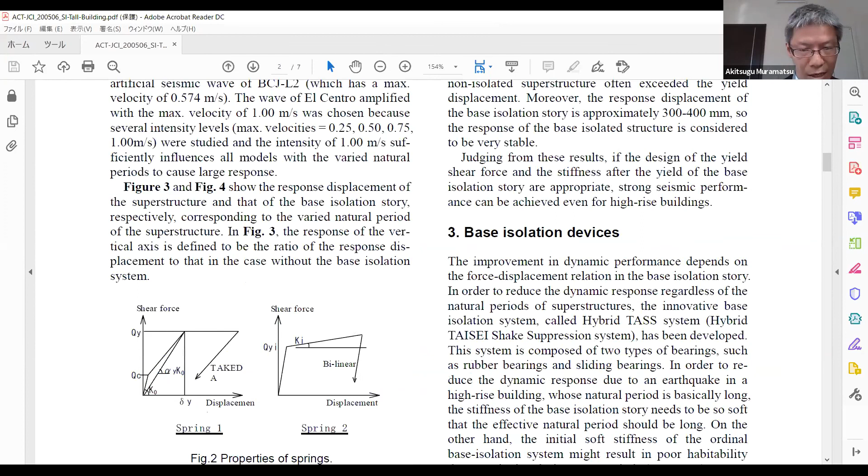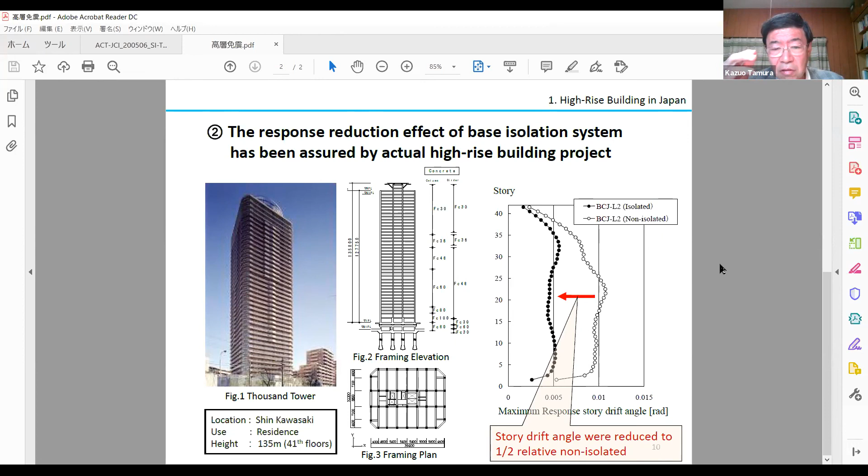Thank you. I want to add some comments to what Muramatsu-san provided. In the case of a tall building, the fundamental period becomes longer, so the seismic isolation effect is reduced compared with lower-rise or mid-rise buildings. But by using seismic isolation, the fundamental period can be lengthened even in a tall building, so the seismic isolation response is at a smaller level than without it in the taller building. Anyway, this is my additional comment.

Thank you very much to both of you. I think we have more questions here - this one is particularly for Professor Tamura: could seismic isolation systems work in conjunction with performance-based seismic design?

I'm not so sure about performance-based seismic design, but seismic isolation may become one of the menus of design. I can't understand the question about performance-based seismic design, but I think maybe seismic isolation becomes one menu. The question is different, I can't understand that. Apparently there are no more comments, so I guess we can move on to another question.